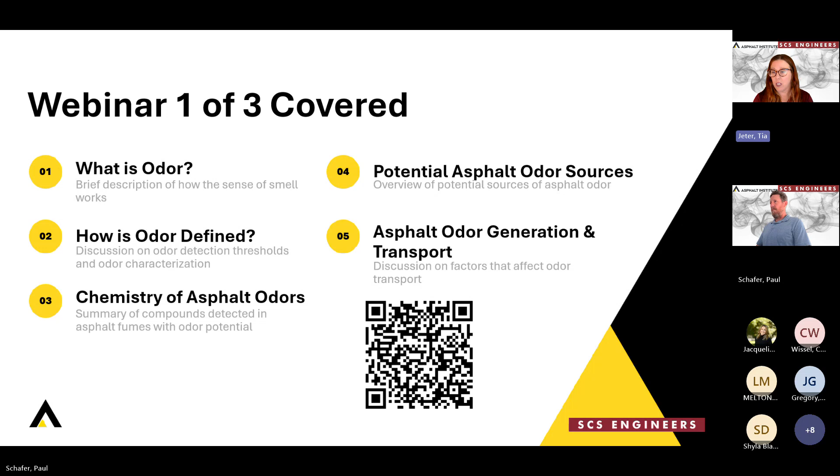So as Shyla said, Paul and I are here to talk on the third webinar of the series of 3. In case you missed the first few webinars and want to go back and take a look at them, just real quick, webinar 1 of 3, we talked about what is odor. We talked about how to define odor, went into a little discussion on the chemistry of asphalt odors and potential asphalt odor sources, and also asphalt odor generation and transport. Webinar 2, we covered odor monitoring options, discussed how to complete an odor assessment, and then discussed some case studies on some odor projects we've worked on.

And then this third webinar, we're going to talk about odor control technologies, discuss how to complete an odor abatement plan, and then provide some insights into community outreach to assist with local odor concerns. So real quick recap on webinar 1 and 2, more so if you haven't heard some of the lingo we use, maybe it'll kind of give you a little head start on where we're at with what we previously discussed.

So first, some facts about odor pollution. A large portion of the complaints issued to regulatory agencies concerning air pollution involve an odor component. And while odor is not recognized by EPA as a pollutant, it is generally regulated at the state and local level as a nuisance law.

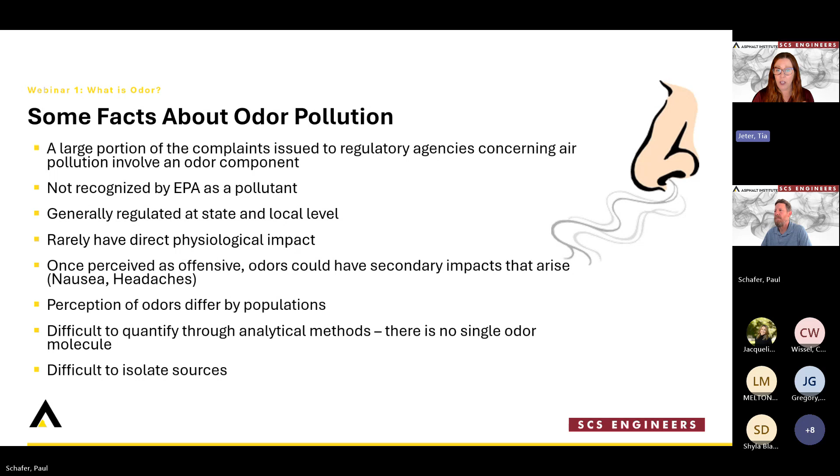Rarely do people have direct physiological impacts from odors, but once perceived as offensive, odors can cause secondary impacts such as nausea or headaches. Perception of odors does differ by populations, and it can be difficult to quantify odor because there's no one single odor molecule. And due to that, it also makes it difficult to isolate sources of odors.

As I said, it's hard to quantify odor. So what science and people have come up with are characterization parameters to try to define what we mean by odor. So the first is odor concentration. This is typically the amount of dilution required to bring an odorous air sample to a detection threshold. So it's the lowest concentration at which you would detect an odor for a certain compound. Typically, the lower the ODT, the stronger that compound is at producing a perceived odor.

Intensity is a way to describe the perceived strength of an odor. There is a way to try to quantify this. It's a comparison they do with a standard, typically n-butanol in odor-free air. But basically, intensity will give you a qualitative scale, with 0 being not very perceptible and 6 being extremely strong on the odor strength scale.

Character is looking at a description of what the odor smells like. So these are actually just adjectives of what it smells like. This could be fishy, hay, nutty, oily, sweet. There's a whole list of different descriptors. If you send an odor sample off to a lab for an odor panel, you would get a list of descriptors from the people doing that panel of what they smelled. And then hedonic tone is a judgment on the relative pleasantness or unpleasantness of an odor. So those are the 4 parameters we look at when trying to describe odor.

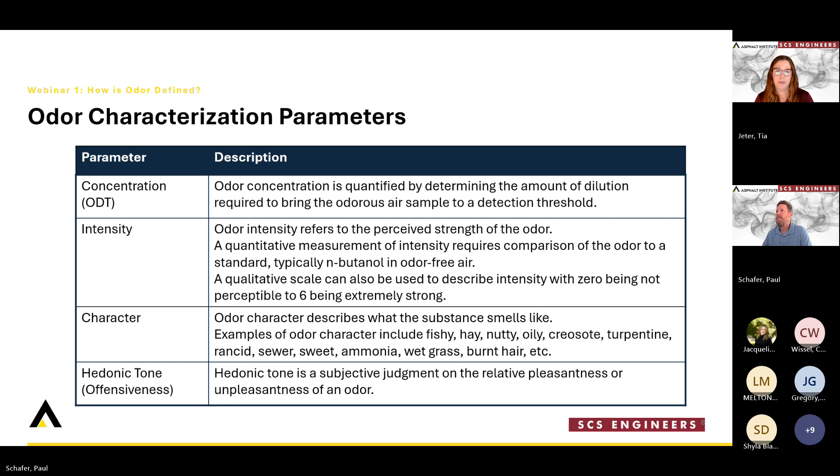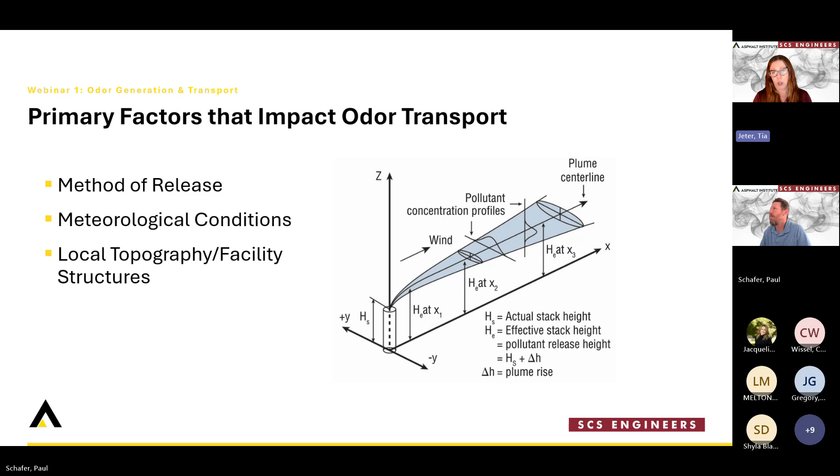Some primary factors that impact odor transport, so how the odor would move from a facility off-site. There's method of release: is this coming from a stack? Is it coming from a wall vent? The meteorological conditions at the time of the event. So is it a windy day? Is it a stable day with low wind speeds? And also the local topography and facility structures can all impact how the odor is transported from a facility.

Speaking more on the method of release, this is specific to each source, and the first thing we look at is the odor emission rate. This is a function of the odor concentration as well as the volumetric flow rate of the release. There's the release velocity. This will impact how far the odor can travel, as well as the potential for mixing and dilution. And the more mixing and dilution you get, the lower potential offsite odors will be. So we want that mixing and dilution to occur.

The orientation of release speaks to, is it a vertical release coming out of a stack, or maybe it's a horizontal release coming out of a wall vent? It could also just be a pile, which is kind of emanating odors. All those things affect the release of that odor.

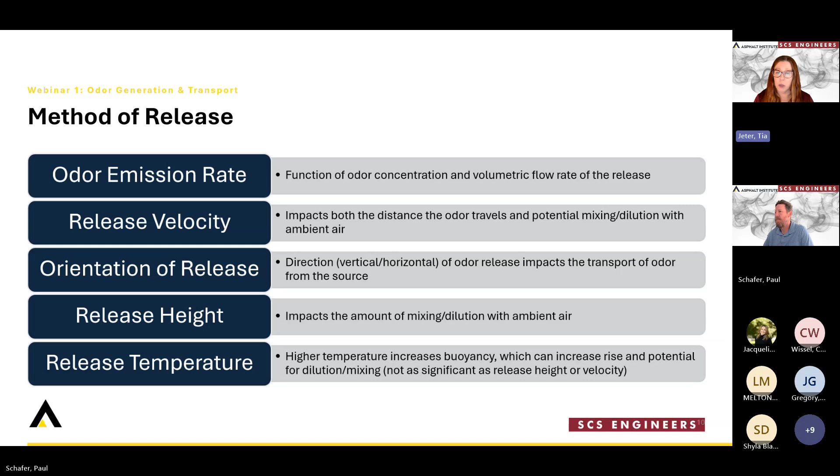The release height speaks to the ability of that release to mix with the ambient air. So typically, the taller, the better. The taller or the higher the release, the more time there is for mixing with the ambient air, which can reduce your offsite impacts. Temperature also plays a role in this. The higher the temperature, the higher the buoyancy, which means it'll be more likely to move up instead of horizontal or down. So higher temperature can also help increase that potential for mixing and dilution.

Some of the ways we gather data and measurements, we talked about this in webinar 2. Just a little example here. We can do on-site odor measurements. This can be with field olfactometers, also commonly referred to as a nasal ranger. We can also use real-time sensors. Typically, this would be for measuring odor surrogates. So we might be sampling for a specific sulfur compound, and real-time sensors for meteorological data.

We also do sample collection. So typical methods for collecting a sample we may send off to an odor lab or to a lab for surrogate analysis. We can use flux chambers. Direct probes are often used when you're looking at surrogates. Method 18 samplers, also called lung sampling, are commonly used to collect odor samples. By using these lung samplers, there's no potential contamination from a pump. You go directly from the source through clean piping into your Tedlar bag.

And then we can do time-average sampling. With these lung samplers, you can set them up to collect a sample, like a grab sample over a one-time event, or you can set it up to do a composite over a few hours to a whole day.

Laboratory analysis is used. So there are odor panels. These are actually people who go to a lab and they smell odor samples. And they tell you what that is, used to determine that detection threshold, at what point they detect the sample. And they will also give you that odor character, so the description of the odors.

We can also use laboratory analysis to sample for odor surrogates. This may be for different sulfur compounds. We might do some speciated VOCs to try to figure out what particular compound is causing a lot of the odor. And then there are also some analytical and empirical estimates we can use where you try to apply speciated data to some known odor detection thresholds to give you an idea or a scale of what you're looking at.

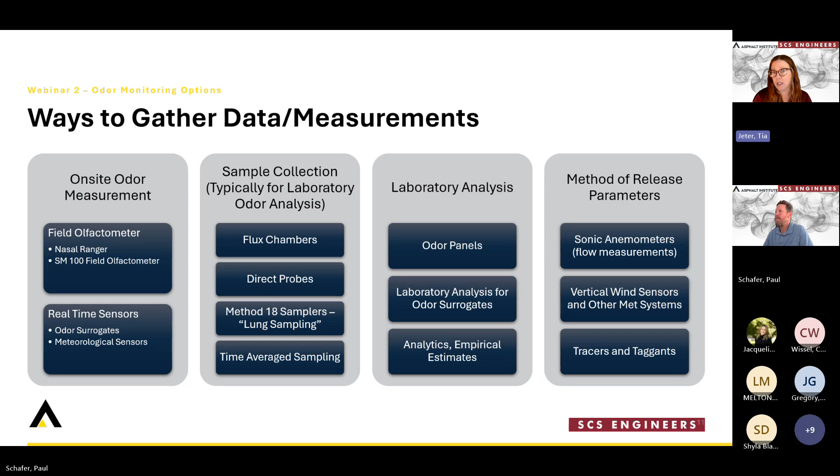And then the method of release parameters, we can use some flow measurements with sonic anemometers. We have on-site met stations for our meteorological data, and then tracers and taggants can also be used to try to assess how an odor will be transported from a facility.

And then the last thing we talked about on the second webinar was how to do an odor assessment. This is what we typically would do for a facility that's maybe having an odor problem, and they're trying to identify where is this coming from and how do we mitigate it. So we identify our potential sources of odors. We collect samples and measurements to define the odor concentration and the character of each source.

We also take those measurements for the release parameters so we can define the flux and flow of the odor. And then we build an emissions profile for the facility. That data can be put in a dispersion model with meteorology to estimate downwind odor impacts from a facility. And then with that model, you can evaluate different scenarios.

You can model what happens if I increase a stack height, or if I turn that from a fugitive source, capture it, and route it through a stack. Or there's a variety of things you can evaluate. And from that, you can build your mitigation strategy as what you want to do to reduce your odors.

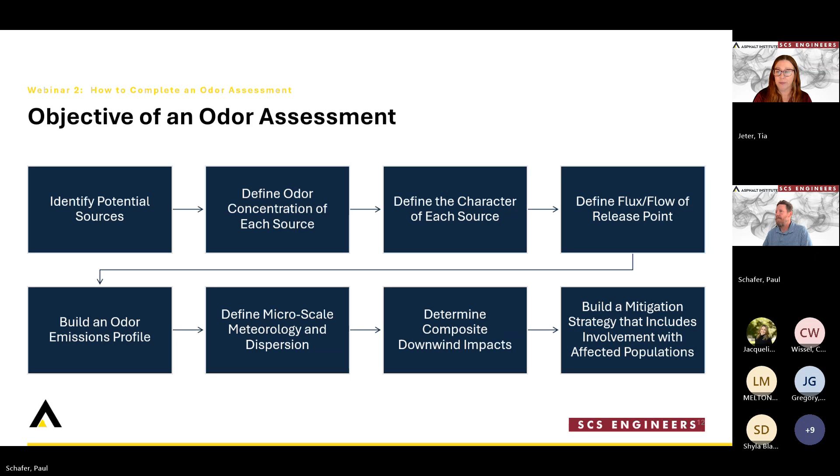All right, so that was just a real quick recap on what we talked about in the first two webinars. For this webinar, our first discussion will be odor control options. So the first thing when you're going to control odor is typically you need to capture it and get it to that control device. It can be very difficult to treat what you don't capture.

And this picture shows you a typical batch mix asphalt plant. As you can see, there are a variety of different activities occurring and different sources where odor can be generated. And trying to capture each one of these types of sources is a different approach depending upon the type of source. But you need to capture those emissions before it can get to a control device.

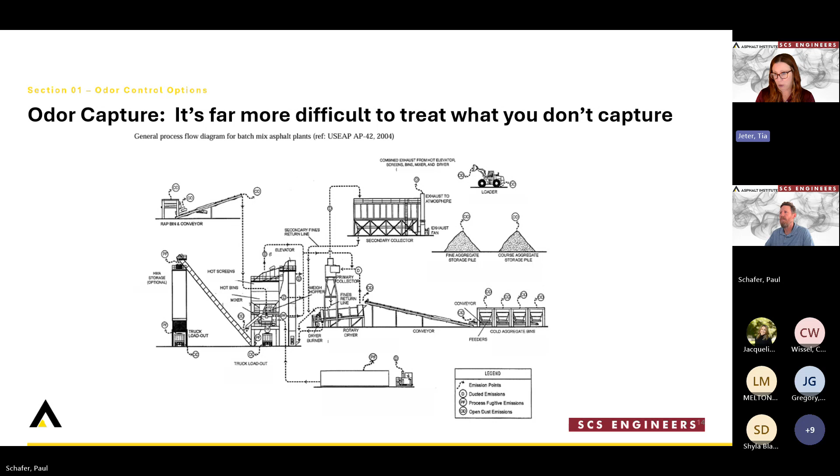So odor capture, if it's a stack or process vent, this can be fairly straightforward. Typically, this is just done with an enclosed ducting or piping system from the point of generation, and then you transport it to the control device. One thing to be cognizant of is, in some cases, it may be easy to capture something, but the volume you capture might not be economically feasible to treat.

One place we've seen this in the asphalt industry is, in some cases, roofing production plants can have very large cooling sections. You could be looking at upwards of 30, 40,000 cubic feet per minute of air. And while these are coming out of a stack, which could make it easy to capture, treating 40,000 CFM of air might not be economically feasible. So you have to think about both. Once it's captured, how do I treat, or is it possible to treat that volume of air?

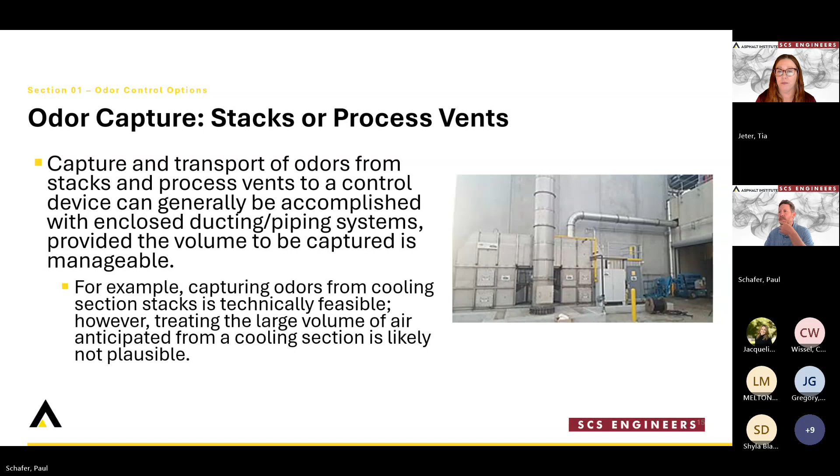Capture on shingle production lines is also something we see in the asphalt industry. Shingle production lines can be a bit of a challenge, only because material needs to move in and out of that enclosure, which makes sealing and ensuring capture of all emissions a little tricky. A lot of times operators also need access to the line during operation. So you also need to make sure that it's accessible to people, which again, you have to go through that enclosure to do that. So a lot of times we don't necessarily see 100% capture on these systems. You will probably have some uncaptured emissions from these lines.

A lot of times they are indoors, and these are typically hot asphalt fumes. So they're going to be buoyant. And a lot of times we will see them rise to the top of the building that's enclosing the shingle production line. And at that point, those emissions may go through a building vent, or they may go through a door that's opened in the building, and then it's a different point of capture. So they all have their own challenges.

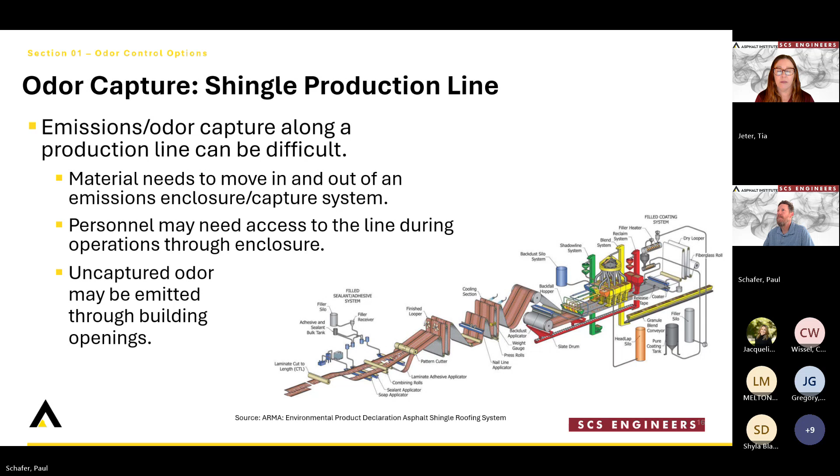And the next one are fugitive components. And when I speak to fugitive components, I'm meaning more on piping fugitive components. So these would be common at a refinery or an asphalt cements and coating facility, where you have the valves, connectors, flanges, relief valves, pumps, compressors. Any of that moving odorous material will have a small leak.

And if you're at a refinery particularly, there could be thousands of these fugitive components. Capturing emissions from thousands of components is just not likely. I would say it's not technically feasible. So a lot of the times, to reduce odors from these fugitive components, you're more going to be looking at an enhanced leak detection and repair program.

So more frequent monitoring, lower leak detection threshold that would trigger repair of these leaking components, or potentially application of odor neutralizers or masking agents in the vicinity of big piping networks. This is the type of control that you would be applying that can try to be used to reduce odors from these sorts of fugitive components.

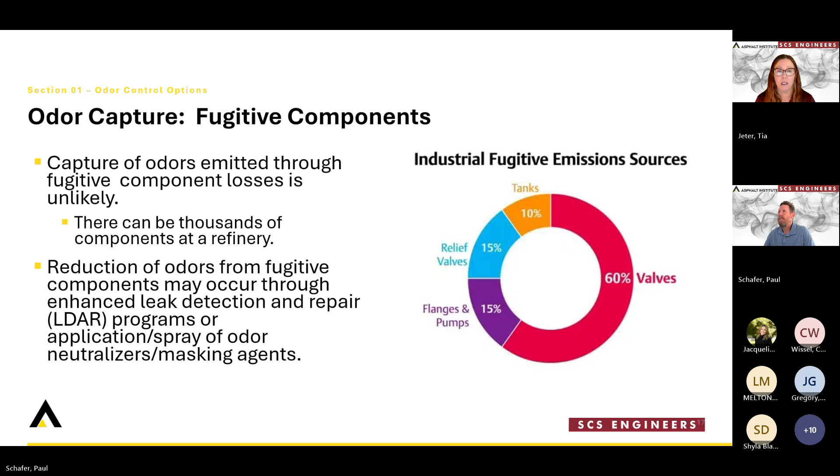Next. Another means, if you can't capture it or enclose it, there are ways to try to do barriers or windbreaks. And this has been used at several facilities. In this case, this picture is showing a bunch of pine trees that are planted as kind of a windbreak and a vegetative screen to reduce odors. And these pine trees, for example, kind of work from a two-sided approach.

One, the terpenes in pine, that odor that you smell, acts as a natural masking agent for odors. So it can help cover up odors that may be perceived as obnoxious. And also the needles or the leaves themselves act as a way to filter odors. So it kind of works as a couple different approaches to reduce those odors, and they have been shown to be effective to reduce some odors from sources that are a little more difficult to capture.

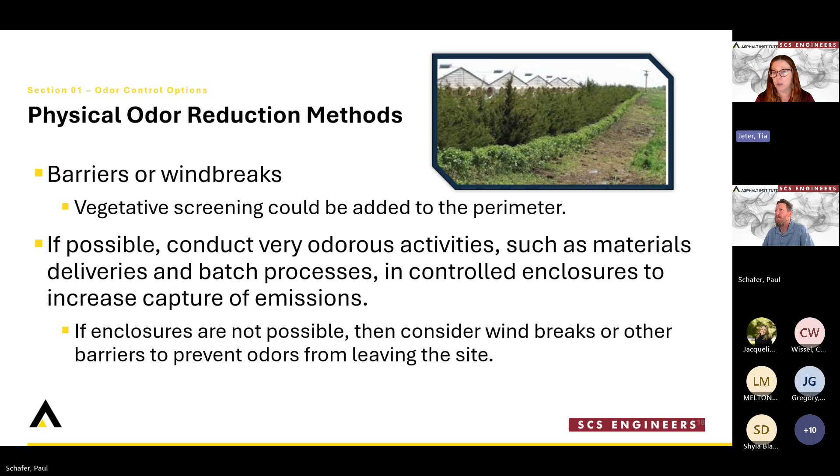So now that we've captured the odors, you have to decide what type of odor control technology you want to use to reduce the odors that you've captured. And here we've divided them into 3 different mechanisms for reducing odors. The first is changing the chemical structure of the odorant to be a less odorous compound. Typically, this requires energy input as heat, an oxidizer, or biological activity, and you actually break the bonds of those compounds into less odorous compounds.

So that's one technique. Second would be to remove or just filter the odorous compounds from the stream. By doing so, you're reducing the concentration of odors in the effluents. And the third is by using neutralizers or masking agents. And the neutralizers and masking agents don't remove or change the odorous compounds, but rather they alter how a person perceives or does not perceive an odor at that point.

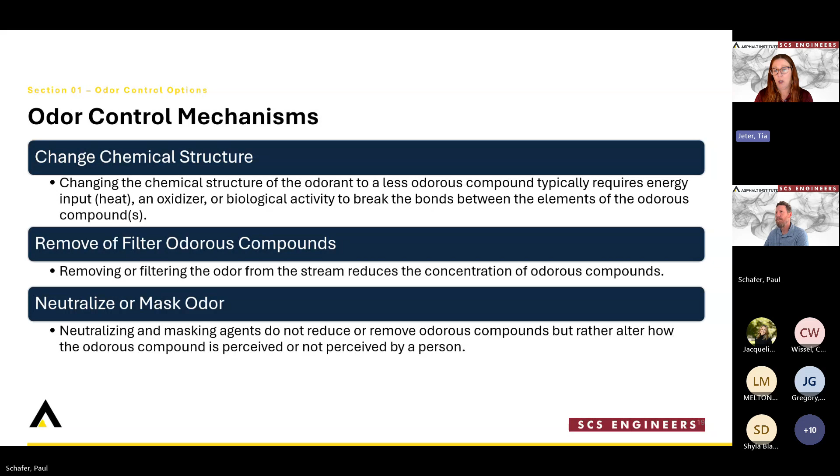So a few examples of technologies where we're changing the chemical structure of the odorous compounds. The first is incineration or combustion. Typically, this could be a flare, a thermal oxidizer, or a recuperative oxidizer. In this case, with combustion, you're generally converting carbon compounds to carbon dioxide and water and some ancillary compounds. The benefit of these, you can get very good efficiencies, 99.99%.

If they are recuperative incinerators or thermal oxidizers, you can also recover some of the heat energy. So there are some efficiencies that can be built into these systems, and they're quite effective against organic odors. Some of the negatives, these can have high initial costs. They can require supplemental fuel, especially if you're doing a thermal oxidizer. You might have a lot of natural gas use on that.

The oxidizers also operate at very high temperatures. They're typically 1400 to 1500 degrees. So it's not one of those systems where you just turn it on and off. If you have to make repairs to this system, you turn it off. It has to cool down for 24 hours or so before you can safely access that equipment.

And in some cases, if you have very high sulfur containing compounds in your influents, there is the potential for formation of acid gases in the effluent. So you have to assess your stream to make sure that one of these combustion approaches is appropriate.

Another technology we can use are chemical scrubbers. In this case, odors are added to a highly reactive chemical. That could be an acid, it could be an oxidizer. And by doing this, the odorous chemicals react in the solution and are removed.

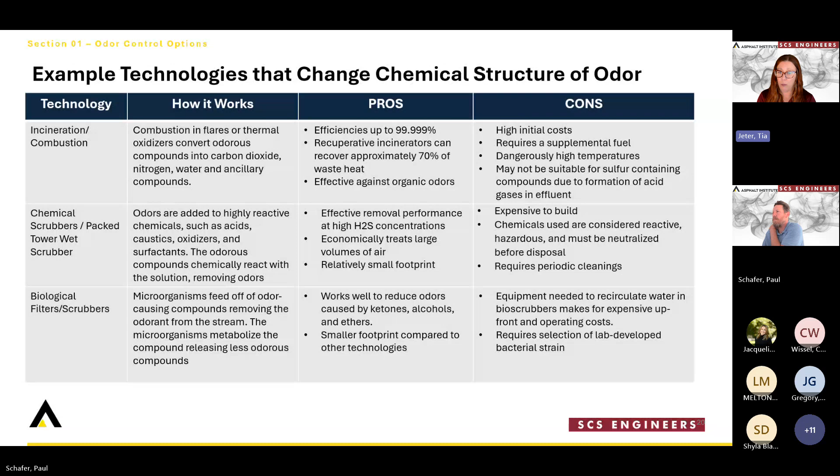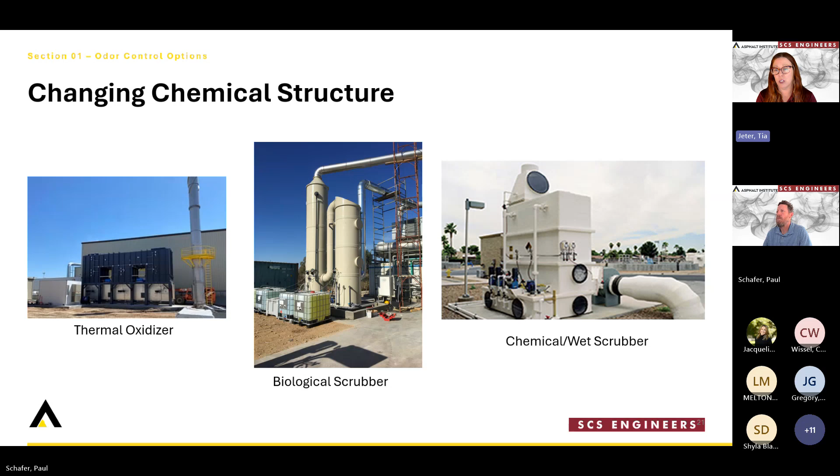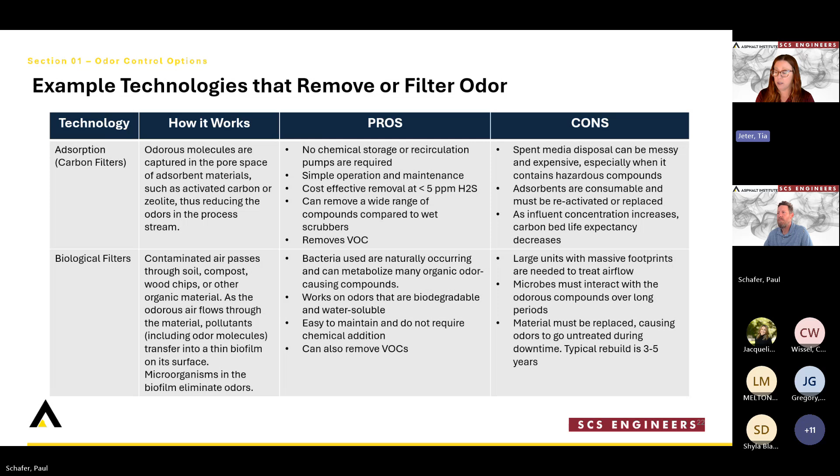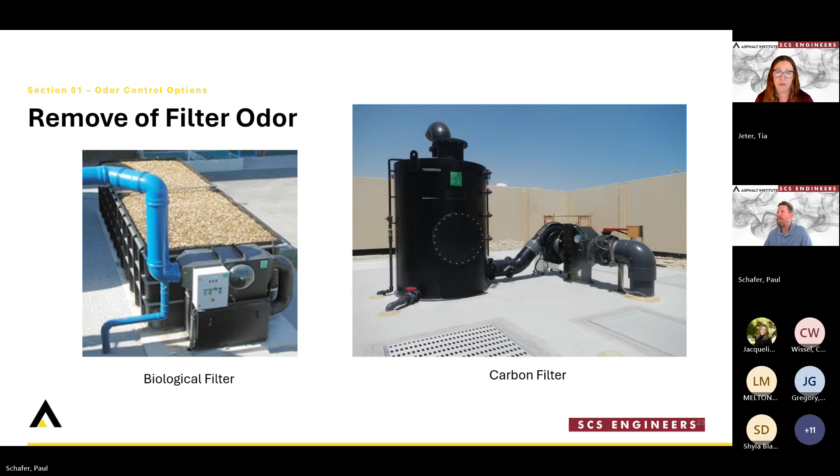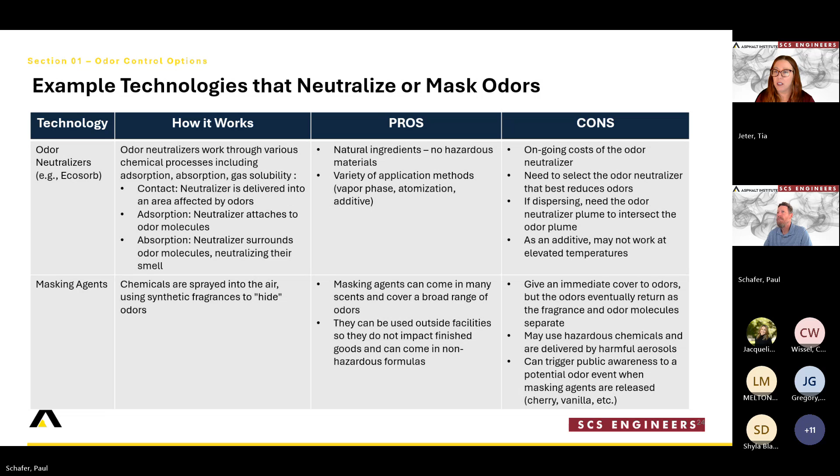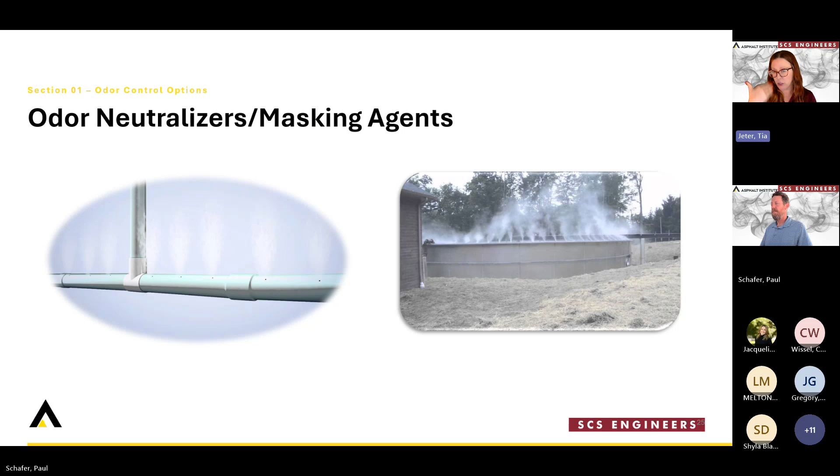This is just a picture of some of the application systems for these neutralizers. A lot of times they're a sprayed or atomized vapor phase. It's nice because you can apply them to areas that can't be captured. But it does require a lot of that neutralizer, having to pay for those costs as you're using it up. The next section I will hand over to Paul, and he's going to talk about how to develop an effective odor abatement plan.

Thank you, Tia. Great job.

Thanks for the handoff. So I'm going to talk about the role of an odor abatement plan. And the reality is you want to be a good neighbor. You want to reduce regulatory and nuisance risk, litigation risk related to odors at your facility. And so in doing that, you need to reduce impacts related to airborne or odor-causing compounds emitted from your facility. Not just that they're emitted, but how they impact the community.

So one of the main things of an odor abatement plan is identifying your location. How are you sited? How close are you to sensitive receptors or public access? All of those things are going to influence your odor abatement plan, how you control odors and your need to control odors. One of the critical things to do is plan ahead, especially if you're at the phase of designing a facility. Thinking about odors and odorous impacts can reduce costs down the line. Also talk to potentially impacted neighbors, because the first time they become aware of your facility being due to an odor impact is not a great introduction.

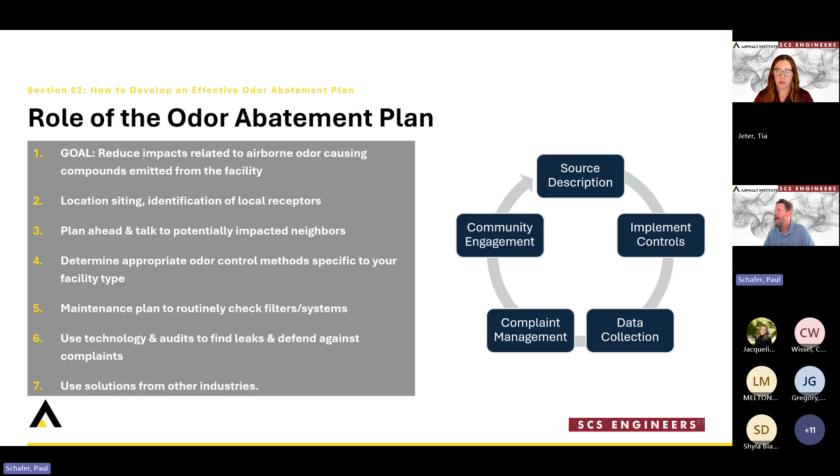Potentially use solutions from other industries. Odor issues have been issues for certain industries for quite a long time, and they've been handling them. So some of those solutions can be directly applied to the asphalt industry. And one thing to note is that all of this is cyclical and connected. Each section of your odor plan is somewhat connected to the other sections and informs how those other sections need to be written.

So just the main features of an odor abatement plan. As we said, facility description and location, and with that, facility name, address, vicinity map, process flow diagrams showing the locations of your odor emitting sources, identifying their odor emitting activities, how and when they occur, operational considerations, and then odor control strategies and best management practices. So what are the ways you're going to control your odors? From administrative controls, engineering controls, maintenance requirements, training of staff, and then a complaint management system.

The facility contact information: where do people lodge complaints? How are those complaints managed? What procedures do you have to respond to a complaint, and how do you reach out to the community once complaints are resolved or looked into? And then if you do have complaints and you are having odor impacts, what is your corrective action plan? What are you going to do to assess and mitigate those impacts moving forward?

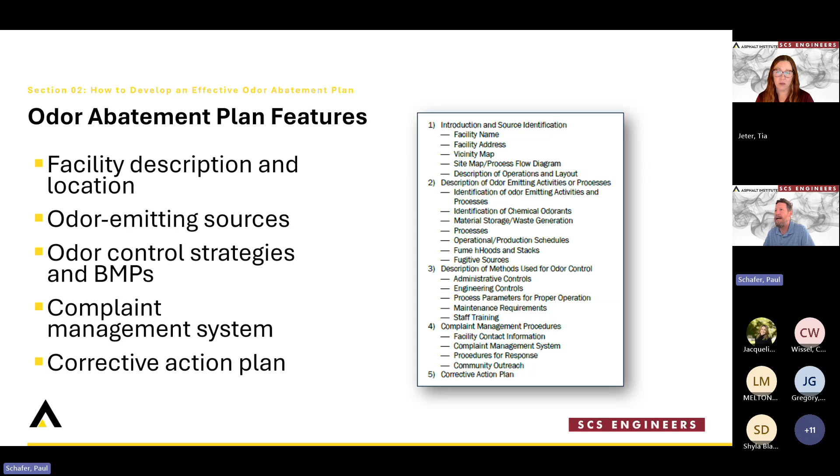One of the main factors in regards to a facility's chance of impacting neighborhoods is obviously its siting. It's a critical factor. If you have the opportunity to site your facility in a location that is not upwind from sensitive receptors, if you can stay in an industrial or agriculturally zoned area, much better than being abutted next to a residential zone or having a school directly downwind or an old folks home. If you have the opportunity to site your facility away from sensitive receptors at the beginning, it is the way to go, and a great way of minimizing your potential for impacting neighbors.

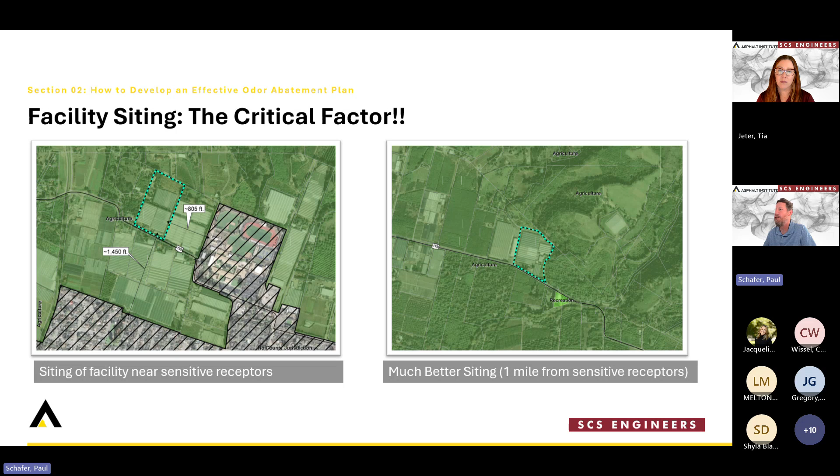So identification of your odor sources. That's one of the key parts of your odor abatement plan. This would entail a comprehensive inventory of your odor generating and handling. This could be your material handling and storage, processing operations, and in previous webinars, we went through all the different types of odor generating activities that an asphalt plant handles, and they include also waste handling and storage areas. And then you also want to identify specific phases and emission points. Where are they being emitted from? Are they fugitive emissions, uncaptured emissions? Are they ducted emissions? What are the flow rates of those ducted emissions? All of those will impact your potential ways of mitigating that source.

Evaluate potential odor pathways. So point sources, stacks, fugitive sources, area sources. Each of the different types of sources will have different mitigation techniques and allow you to prioritize which ones will have the greatest benefit for reducing impacts to your neighbors. Document your facility layout and your proximity to receptors. Where are your buildings, and what is your wind direction most of the time? Document all those things so you have those understandings of how your operations can impact.

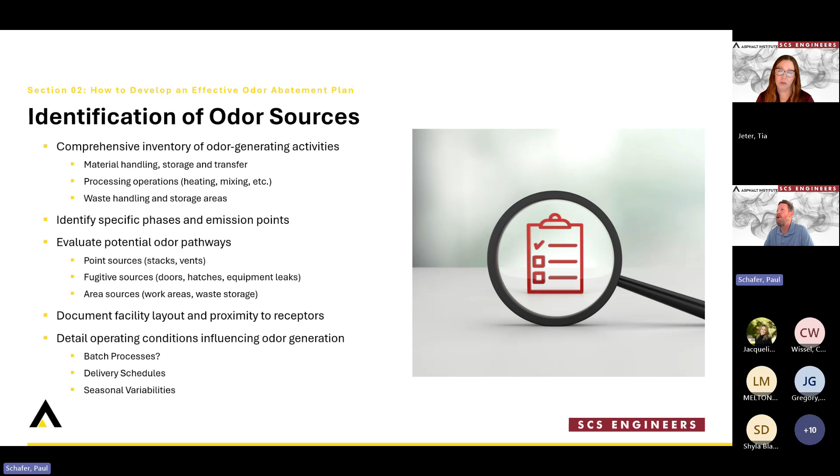And then detail the operating conditions influencing odor generation. Are you doing batch processes or continuous? Are there delivery schedules that can affect it? Are there seasonal variabilities where the throughput significantly changes during certain seasons and is significantly less than other seasons? All of those things are important parts of an odor abatement plan, and within it, that identification of odor sources.

So after you've identified your sources, you need to now detail how you're going to control them and what best management practices, administrative controls, or engineering controls you're going to implement. Those engineering controls include capture systems, enclosures with negative pressure areas to make sure that the odors you're generating are getting collected and pulled towards a collection device. And then there's the treatment systems. Tia just went through all of the different types of treatment systems relative to the odor source type.

There's also operational BMPs: doors, hatches, and access points, making sure that those are closed, containing and sealing waste materials immediately. And this has to do with training and keeping people aware that odor is an important part of operating a facility. Oops, sorry.

And then there's also the preventive maintenance portion: routine inspection of odor control equipment, filter media replacement and system performance checks. Depending on your odor mitigation equipment, you need to detail how you're going to maintain it and ensure it's working properly. And then you need to assign an odor management lead for the facility. Who's responsible for the oversight, inspections and implementation? If no one's responsible for it, the work will not get done.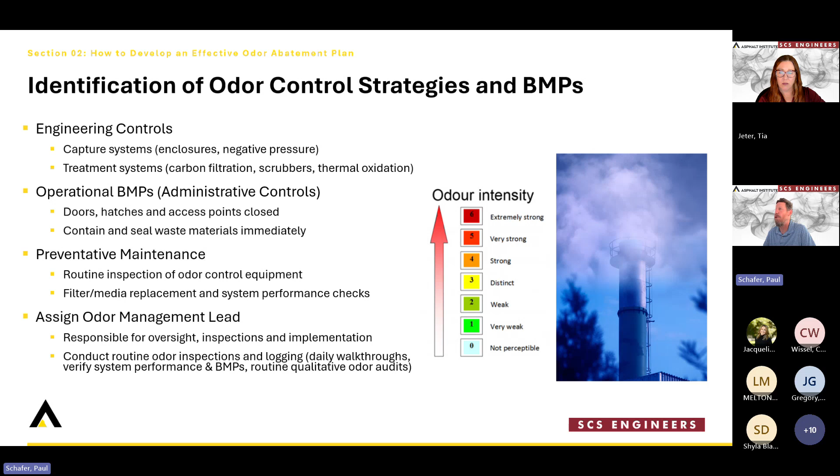Another portion of your odor abatement plan is going to be your complaint management system, and this is really a critical portion of how you work with your neighbors if you are having odor complaints. You need to have a complaint management system that has utility, that works for both the facility and the impacted neighbors. And it's important that you have a facility odor point of contact that is responding to these things, so there's not a whole bunch of people doing dissimilar responses.

This needs to be fairly uniform, and it needs to be done under a method so that the data is being intaked in a way that provides utility to the company. And so you need to standardize the complaint process. When a complaint is being lodged, it's important that the location, the time, the duration of the odor event, the meteorological conditions, and observations of the character are taken into the complaint process. That way you have utility, and when that information comes in, you know the details of why that complaint was logged.

The complaint tracking database needs to be able to log all of them for trending, for heat mapping, for finding the frequency of impacts at specific locations and overall. Rich complaint data helps inform source attribution, what operational things were going on at the facility at the time the complaints occur, or what meteorological conditions exist every time a complaint occurs. It also captures the real-world exposure of people downwind, or people who are lodging complaints. And it's a direct linkage to the community experience.

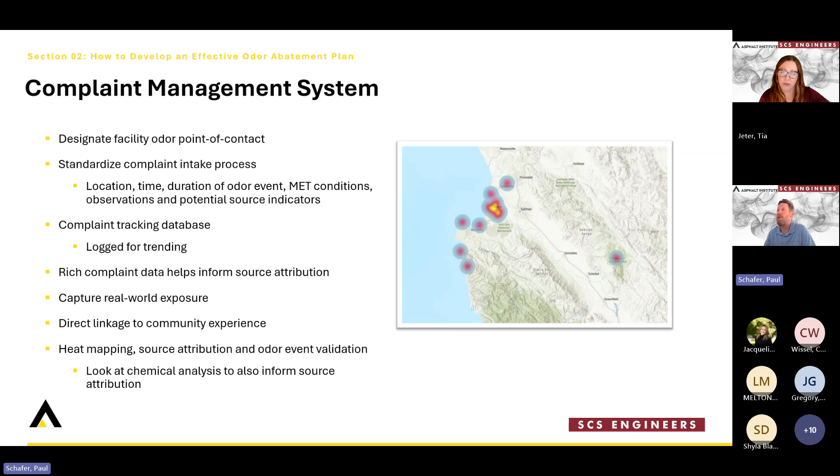So once you've had enough complaints, or you've determined that you are impacting, what will trigger criteria for corrective action? That needs to be in the corrective action plan portion of your odor abatement plan. So what is the trigger criteria for the corrective action plan? Is it verified complaints, the number of complaints? Is it equipment failure? Or is it an odor exceedance of a certain value that triggers, or a multiple of those types of things?

The corrective action plan needs to have a root cause evaluation. So is it you? Are you the contributing source? Or is there a specific subsource at your facility that is causing the conditions? Are there operational considerations or conditions that have changed that are creating the odor? Or were there system performance issues? So a root evaluation of what is causing the complaints or the odor impacts needs to be included in the corrective action plan.

You need to implement targeted corrective measures. So not just check the box, we tried something. You need to implement corrective measures that have science behind them. Are there equipment adjustments? Is the throughput of an odor control device too fast for it to be reaching the odor removal efficiency that it was designed for? Is there breakthrough in your media? Does it need to be replaced or repaired?

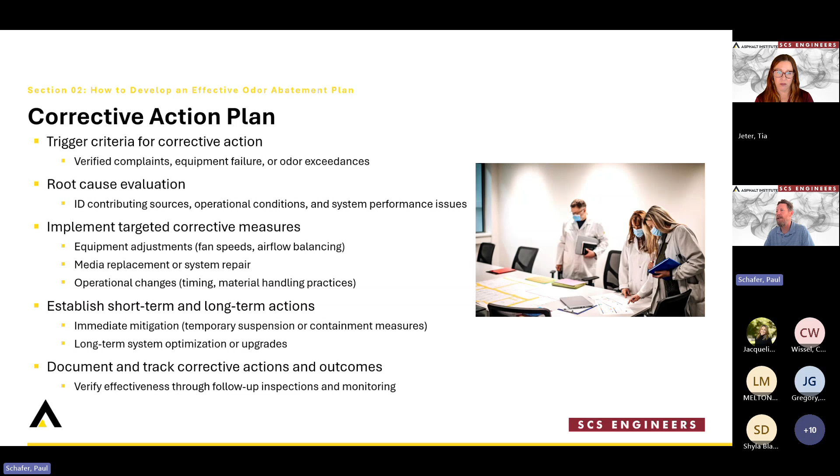So what are the key understandings and common mistakes made during odor abatement plan development? Like I said before, location, location, location. It's very, very important to understand your location. Your need for mitigation is going to be directly tied to how close sensitive receptors are and residential areas and people who can complain.

There is a critical industry need for odor abatement planning. The rate of complaints has significantly increased, not just for the asphalt industry, but overall throughout all industrial processes. And industry growth means increased odor challenges. This is also because the space between odor sources and the community is shrinking. Oftentimes, the source was, when designed, out in the middle of nowhere or not near residential areas, but now residential areas are encroaching on those odor sources, increasing the challenges for these types of sources that have existed for a long time. But it's really the change of their surrounding area that has increased their odor impacts.

It's important to have science-driven and quantifiable solutions. You need to look at your odor impacts and your concentrations, and to be able to assess, are you actually reducing them? And if you're applying a source, are you achieving the measurable odor reduction that was sold to you from the odor control device?

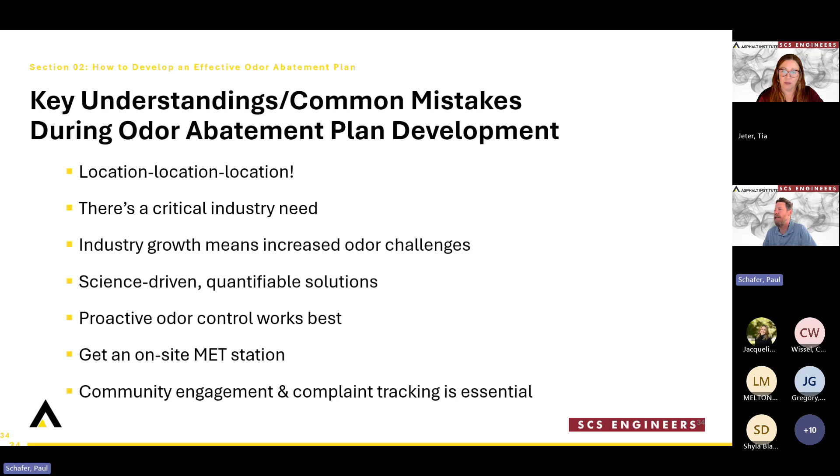And community engagement and complaint tracking is essential. If you don't have that information, that void will be filled by the people in your opposition. So have quality data, collect your quality data, engage with the community, and make sure that complaint tracking is occurring and that you have a diligent system for it. And now that we've talked about the odor abatement plans, we'll talk a little bit about community outreach, the importance of it, and methods that work for outreach to the community.

So like we said, be proactive. Don't wait for complaints to occur. Share updates about your facility upgrades on a company website. Install a meteorological system prior to facing complaints. Manage your incoming complaints: have a complaint management system that's easy for the public to use. You should potentially have multiple ways for them to lodge the complaint. You would rather them lodge the complaint to your facility than to a government agency or start calling lawyers. You'd rather them be calling you to help mitigate the situation, work together with the community.

Prioritize timely responses. If somebody's lodging a complaint and it's taking days for you to respond to them, that odor's no longer there. A lot has changed, and you're not going to get a lot of cooperation from the community members if you're not prioritizing timely response. Ingest data with utility. So if you're getting complaints, it's important that the location of the odor observation is tracked, the time of day, the character of the odor and the odor description, how long the odor was experienced. All of those things are very important in regards to your response. So make sure that you're ingesting data that has utility for remediation and response.

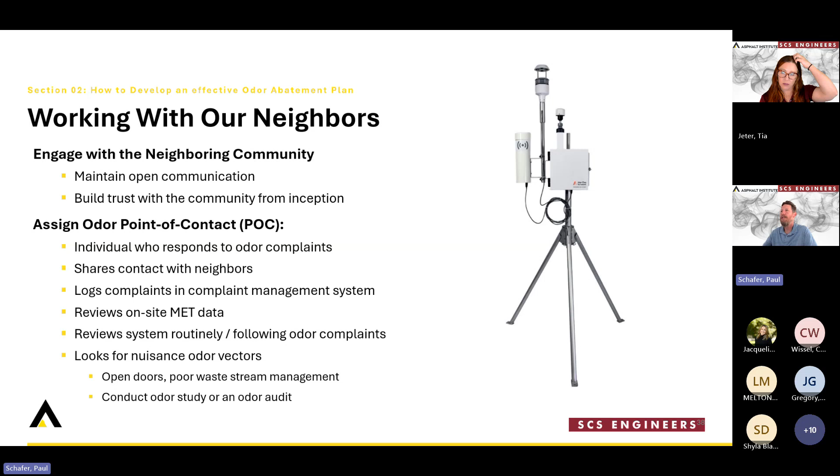So the benefits of collaborative planning, it's obvious, and it's in the data. Complaint reduction. If you invest in odor control, you're going to reduce your odor complaints. We found that the data shows that investments in odor control systems reduce odor complaints by as much as 50 to 75%. It gets the community to buy in. A study shows that community engagement reduced odor-related complaints by 50% within 6 months of implementation. That is just simply engaging the community and showing them that you're serious about odor control.

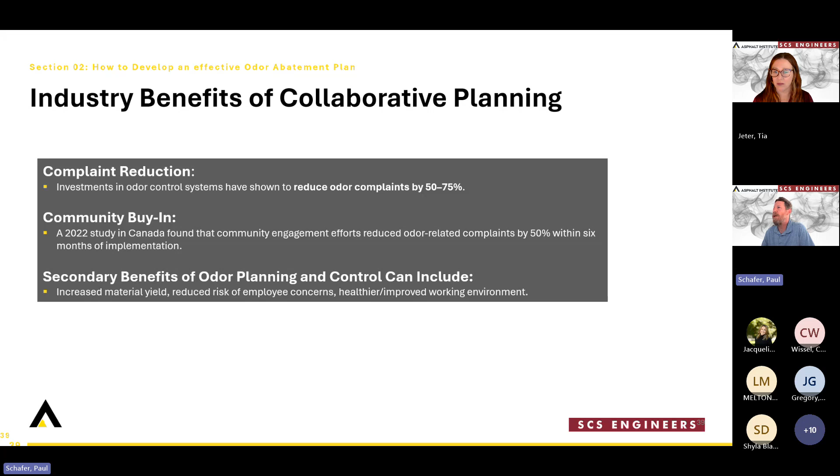The secondary benefits of odor planning and odor control can include increased material yield, reduced risk of employee concerns, and a healthier and improved working environment for your employees.